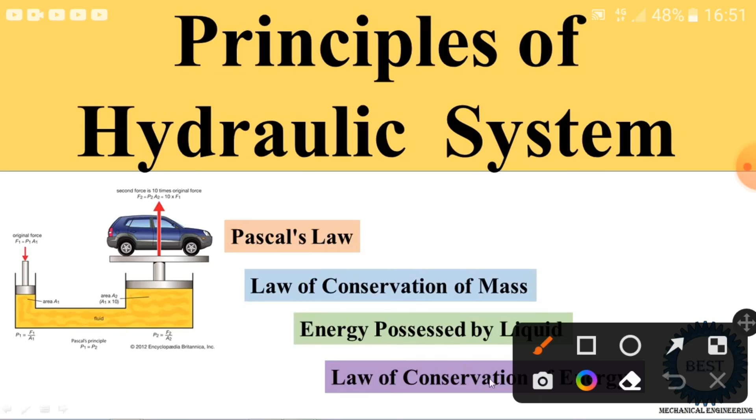These principles you already study in a fluid mechanics subject. Okay, so in this video I discuss what is the Pascal law, law of conservation of mass, energy possessed by the liquids, and the law of conservation of energy. So first we start with the Pascal law.

Now first we understand the definitions of Pascal law with these examples of the plunger and ram. Pascal law states that intensity of pressure... Okay, so they are talking about the intensity of pressure. In intensity of pressure there is a different format available. So intensity of pressure is same in all the directions. Now here we take the examples.

These are the cylinders. Here two cylinders are there, cylinder 1 and cylinder 2, connected by a pipe. Inside the small cylinder the plunger is provided. On that plunger we apply some force, here some liquid is filled, and here the ram, and this weight is lifted by this ram. So when we apply a certain force on this plunger, some pressure is created at the surface of the plunger and the liquid, and this pressure is transferred through the liquid to this ram.

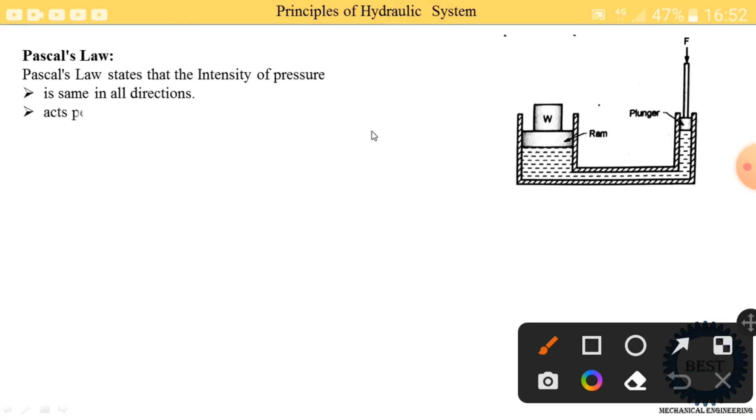So at that time the intensity of pressure is same in all the directions. Suppose we take the horizontal direction, vertical direction, in every direction the intensity of pressure is same. Second, intensity of pressure acts perpendicular to the contact surface. Perpendicular is also called normal. Perpendicular means at 90 degrees.

Suppose we take this surface, that is a vertical surface. On this surface the intensity of pressure acts at 90 degrees, means acting in the horizontal direction. Suppose we consider this horizontal surface, then the intensity of pressure acts in the vertical direction, that is called perpendicular. Third point, intensity of pressure is transmitted throughout the system equally, means intensity of pressure is same in the full system or every point of the system.

Fourth point, intensity of pressure is same at every point within the system. You take any point. Suppose you measure the intensity of pressure at this point and measure here, here. Anywhere you measure the intensity of pressure, it is the same at every point within the system. So this is the basic definition of the Pascal law. Now we take the example.

The first example: consider an air balloon, with air filled under pressure in it. So we take one balloon and fill it with air. Air pressure is same in all the directions, and it's acting normal to the surface of the balloon. Hence the balloon is spherical in shape. So due to Pascal law, the shape of the balloon is spherical when we fill compressed or pressurized air. Second example, consider a hydraulic lever as shown in this figure that we already discussed here.

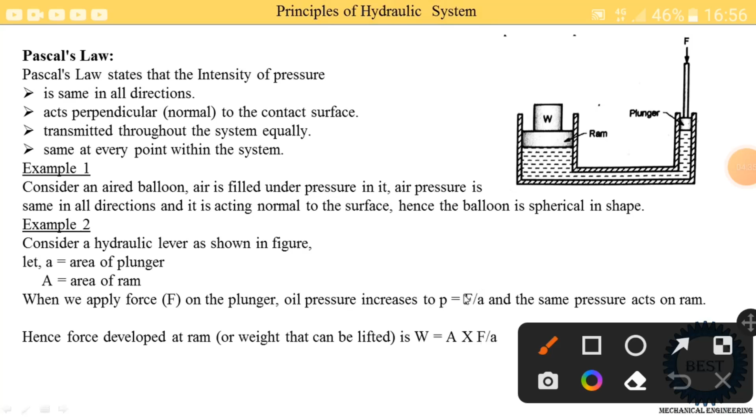Hence the force developed at the ram, or weight, can be lifted. Here you see that the weight is put on the ram and it may be lifted. So how much of the weight is lifted is found by using these equations. Weight lifted, denoted by W, is equal to area of the ram into the pressure. And what is the equation of pressure? The equation of pressure is F by a.

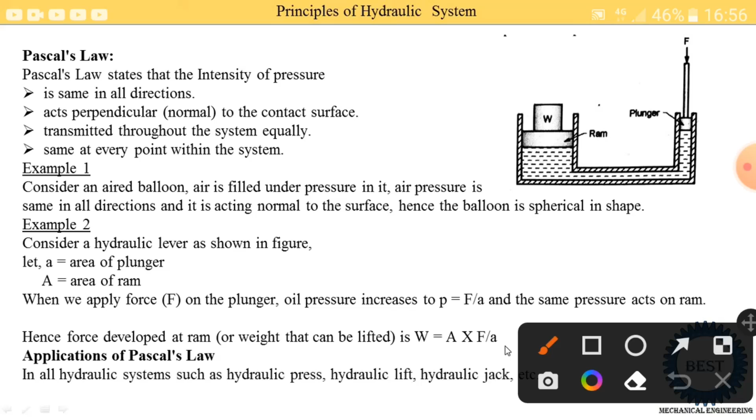Now what are the applications of the Pascal law? In all the hydraulic systems, such as hydraulic press, hydraulic lift, hydraulic jack, in every hydraulic system the Pascal law is applicable.

Now moving on to the second law, law of conservation of mass. For that we are considering one nozzle. Inside this nozzle the liquid is flowing in this direction, as the arrow indicates, and this nozzle is divided in three sections: section 1, section 2, and section 3. From the name you can understand it is about the mass or flow rate of the liquids. The law of conservation of mass states that matter cannot be created nor destroyed.

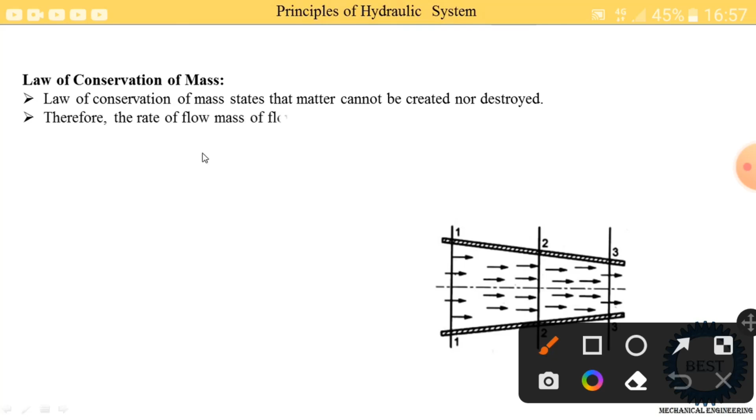Suppose here a 2 meter cube per second flow rate is there. Some quantity of mass is entered. It is not destroyed or created in between. So the same quantity of matter goes in and out, but the velocity or some other energy changes in between. Therefore the rate of flow of mass of flowing liquid in a pipeline remains the same at all the sections along the line of flow.

The rate of flow of mass of the flowing liquid in a pipe remains the same, meaning Q1 is equal to Q2 is equal to Q3. This law is called the continuity equation. So what is the continuity equation? For a steady and incompressible flow, incompressible meaning it is applicable to liquids, the rate of flow, meaning discharge of the liquid, remains constant at the different sections. Here we take the 3 sections.

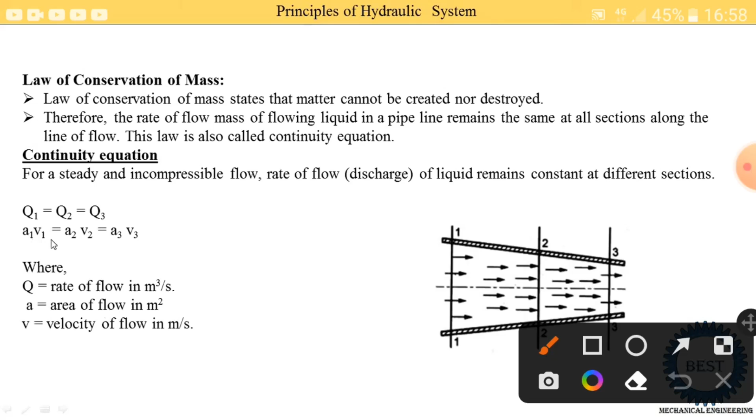The rate of flow Q is the same: Q1 at section 1, Q2 at section 2, and Q3 at section 3. Here the area is changing, so with the area the velocity changes, but the quantity is the same at all 3 sections. Q is also written as area into velocity, so Q1 is replaced by A1 into V1, Q2 by A2 into V2, and Q3 by A3 into V3. Q is rate of flow in meter cube per second, A is area of flow in meter square, and V is velocity of flow in meter per second. 1 means at section 1, 2 at section 2, and 3 at section 3.

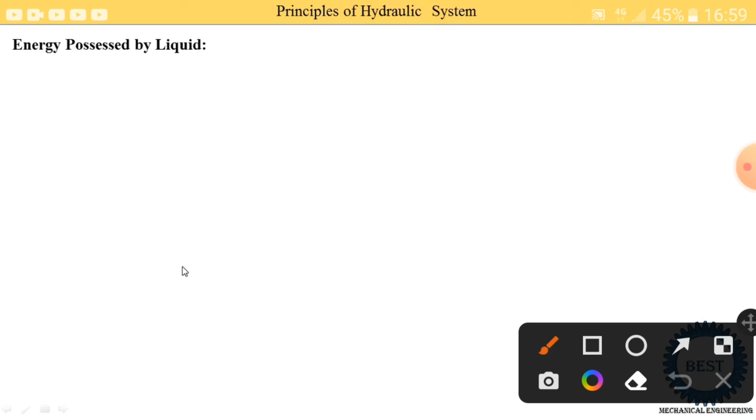Next, the energy possessed by the liquid, meaning which types of energy are present in a liquid. We derive the equations of this energy. Energy exists in different forms. In a flowing liquid, energy is present in the form of pressure energy, potential energy, and kinetic energy. In fluid mechanics you study Bernoulli's theorem. Every substance has 3 types of energy: pressure, potential, and kinetic. Now we derive the equations for all the energies as well as the heads, so we derive 6 equations.

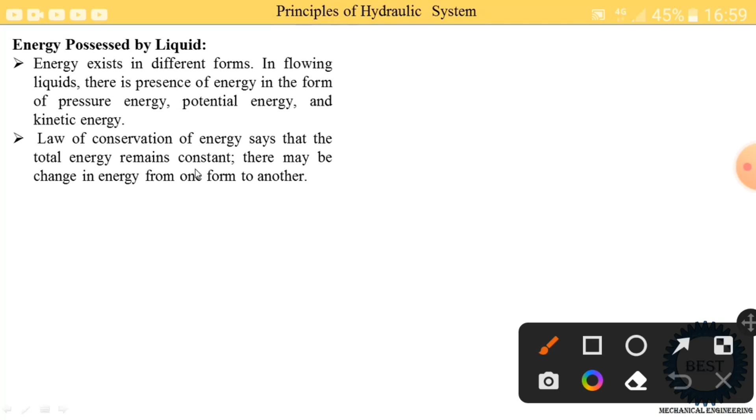But we know that when the velocity is increased, the pressure is reduced. So the energy is converted from one form to another, but the total energy at every section remains constant. So first we learn what the kinetic energy is.

It is defined as the energy possessed by the liquid particles by virtue of motion. Due to the motion of the liquid, the energy produced is known as the kinetic energy. Due to the velocity, some energy is produced, and that is called the kinetic energy. Kinetic energy is denoted by Ke.

The equation of the kinetic energy is equal to 1/2 mv². M means the mass of the liquid and V is the velocity of the liquid. The unit of kinetic energy is Newton meter, or joule. Now we further modify this equation.

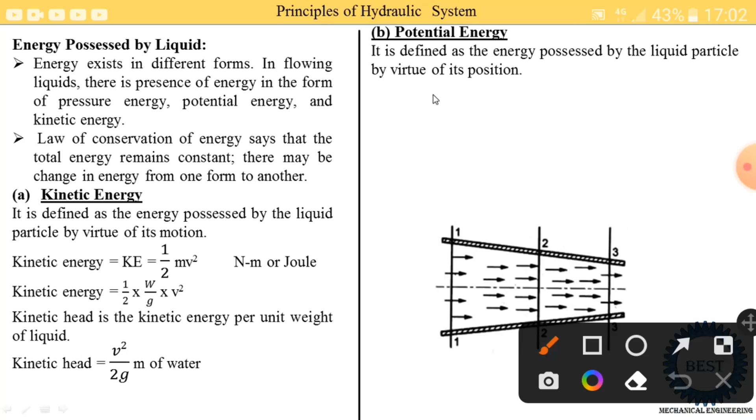Next we learn what the potential energy is. Potential energy is defined as the energy possessed by the liquid particles by virtue of its position. Suppose the water is stored at some height. Depending on its position, when water is stored at a greater height, it has more potential energy. When water is stored at a lower height, it has lower potential energy. That is called by virtue of its position.

The equation of potential energy is equal to mass into g into Z, and the unit is Newton meter, or joule. M is mass, g is gravitational acceleration, and Z is the height from the datum level. Suppose we consider this as the datum level, and the height is 5 meters from the datum level, so Z is equal to 5 meters. So M into g is equal to weight.

Here we wrote that M is equal to weight by g. So M into g is also written as the weight, so M into g is replaced by the weight. Next we write what the potential head is.

Potential head is the potential energy per unit weight of the liquid. The equation of the potential energy is divided by weight, and then we get the equation of the potential head. So potential head is equal to W into Z divided by W. W is cancelled, so potential head is equal to Z meters of water.

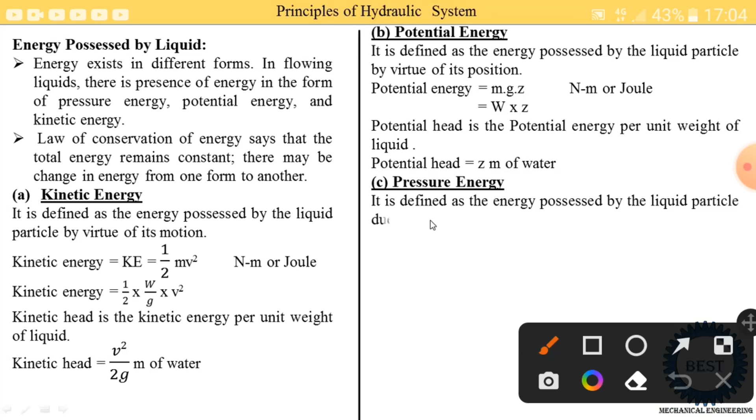Third, we consider the pressure energy. It is defined as the energy possessed by the liquid particles due to the pressure of the liquid. Due to the pressure, the liquid has a certain energy, and it is called the pressure energy. What is the equation of pressure energy?

Pressure energy is equal to pressure into volume, and the unit is Newton meter, or joule. So it is written as P into V, and this volume is replaced by the mass upon density. So this equation is further written as P into M divided by rho.

Now next we find out the equation of pressure head. Pressure head is the pressure energy per unit weight of the liquid. Means this equation is divided by the weight, then we get the equation of pressure head. So pressure head is equal to P into M divided by rho into weight. Okay, and the weight is replaced by the mass into gravity. So these M and M cancel.

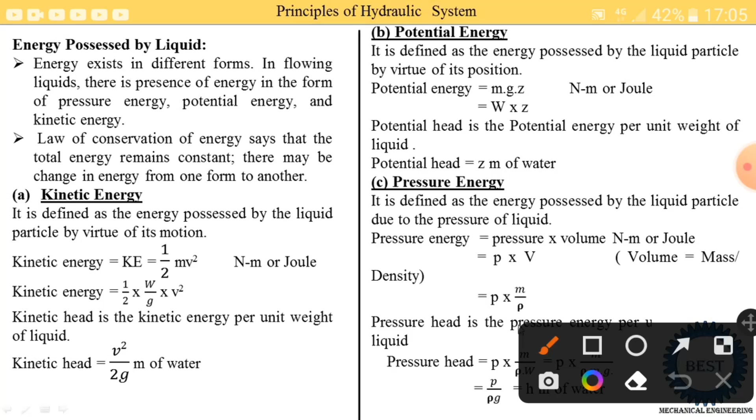So what is the equation of pressure head? The equation of the pressure head is equal to P upon rho g, and this P upon rho g is further in short written as H. Okay, and the unit is the meter of water. So here we study that three types of energy are there. Next we study the law of conservation of energy.

The law of conservation of energy states that energy can neither be created nor be destroyed. It can only transfer from one form to another. Okay, means we are not able to create the energy, we are not able to destroy the energy, but we can transfer it from one form to another. Means some liquid enters a pipe, at that time it has some kinetic energy, pressure energy and

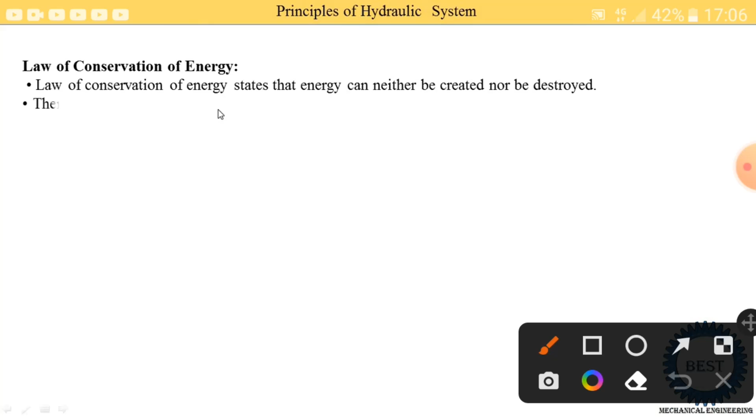the potential energy. So when flowing through the pipe at different heights, its form of energy is changed, but the total energy remains the same throughout the pipe at every section of the pipe. Therefore the total energy of the flowing liquid in a pipeline remains the same at all the sections, along the line of flow, and this law is given in a different way by Euler's equation and

Bernoulli's equation. Okay, so here we understand by using this figure, in which a nozzle is considered with three sections, 1 to 3. So what we have written here: total energy of flowing liquid in a pipeline remains the same at all the sections. So the total energy at section 1 is equal to total energy at section 2 is equal to total energy

at section 3. But we know that at section 1 the velocity energy is different, at section 2 the velocity energy is different, at section 3 the velocity energy is different. Similarly at section 1 pressure energy is different, at section 2 pressure energy is different, at section 3 pressure energy is different. But the total energy is the same when we sum them, according to the law of conservation of energy. So first we study Euler's equation, then we move towards Bernoulli's equation.

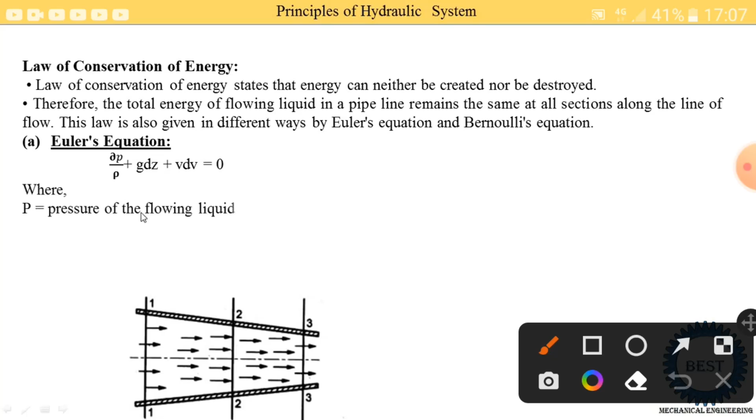So this is Euler's equation. We do not derive it, but it is directly written as dP divided by rho plus g dz plus v dv equals zero. Where P is the pressure of the flowing liquid, rho is the density of the liquid, g is acceleration due to gravity, z is the potential level or head, and v is the velocity of flow of liquid.

Now second is Bernoulli's theorem. Bernoulli's theorem states that for a steady, incompressible, non-viscous flow of liquid, means suppose the liquid is flowing through this nozzle at a steady rate, so Q is the same at all the sections, and the liquid is incompressible and non-viscous, the total energy of liquid particles at every section remains the same, means at all three sections the total energy is the same.

So total head is equal to a constant, means kinetic head plus potential head plus pressure head is equal to a constant. Now suppose we apply this equation at section 1 and section 2. We know that kinetic head is v square upon 2g, potential head is z, and pressure head is p upon rho g, and their sum is constant. We apply these at section 1 and section 2, knowing the summation of all the energy at 1 and 2 is the same.

So we write v1 square by 2g plus z1 plus p1 upon rho g is equal to v2 square upon 2g plus z2 plus p2 upon rho g. You can also make these equal at section 3, that is v3 square upon 2g plus z3 plus p3 upon rho g.